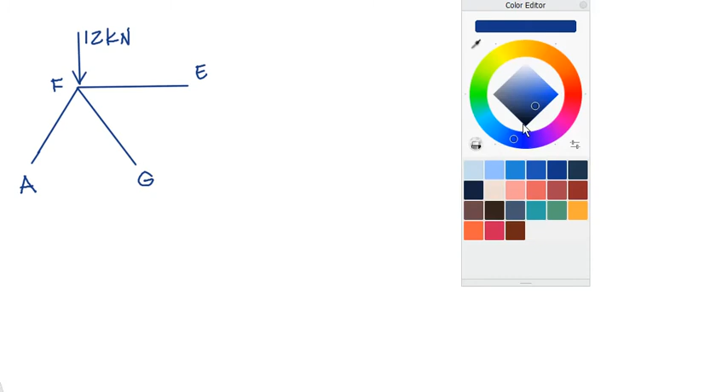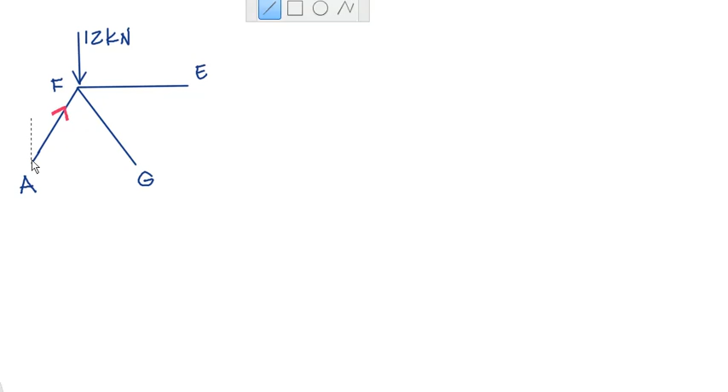Alright, what's the rules? Any force that's not vertical or horizontal, we resolve into components. Okay, we know that AF is in compression. Now, very careful. Compression means it's pushing toward the joint. I'm going to resolve it into its components. Looks like this. Okay, and we know the force here, we know the angle. The angle is 60 degrees.

Now people, just a word of advice. A lot of students, when they come to a joint like this, because they've solved it early on, they just leave it completely out, and they say, no, I'm going to look at just FE and FG. That's wrong. Remember this force here, bits of it are running into AF and to FG. FE carries none of this load, because it's at right angles to it. But members AF and FG are both sharing that load in some way. So that means you've got to account for it again. Even though we know it, I resolve it into its components and solve accordingly.

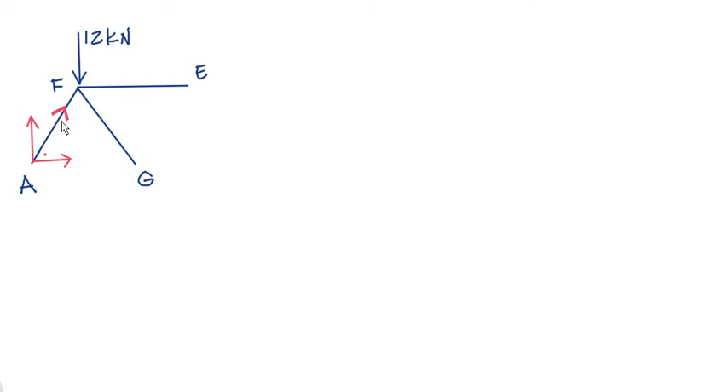Right, so that's 60 degrees. So that there will be AF cos 60. AF cos 60, I'm going to write it over here. Oops. And that's going to be AF sin 60. I'm going to write it like this. Oops, that's not going to be good. AF sin 60.

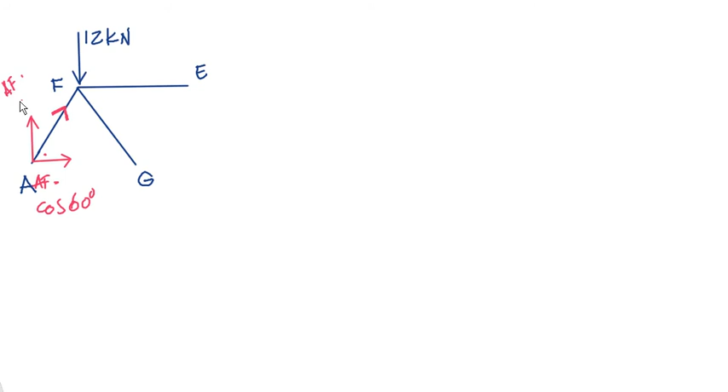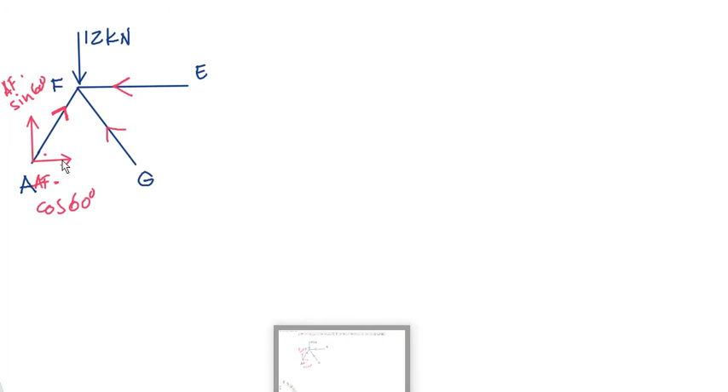Right, FE. I'm going to assume it to be in compression. Remember, E in the frame is sitting somewhere over there. It's 5 meters away. I'm not concerned with what's happening at the right end of E. And FG, I'm going to assume it to be in compression too. G is far below here, it's off my screen, by my feet. It's 5 meters away. I'm not concerned with the lower end of G. I'm just concerned with the upper end of AF, the upper end of FG, and the left end of FE. Okay, one arrow only, not two. If you put in two, you're going to confuse yourself.

Right. I've got to resolve forces in FG as well. So let's just do something here. Right, that's 60 degrees there. So that's going to be FG cos 60. Sorry, my apologies, let me just undo that. And that's going to be FG sin 60. FG sin 60. Right. Do I resolve FE? No, I don't. It's horizontal. So what do we do next? We sum verticals and sum horizontals.

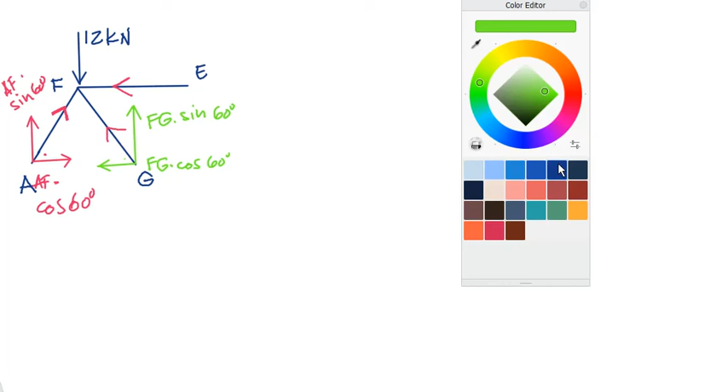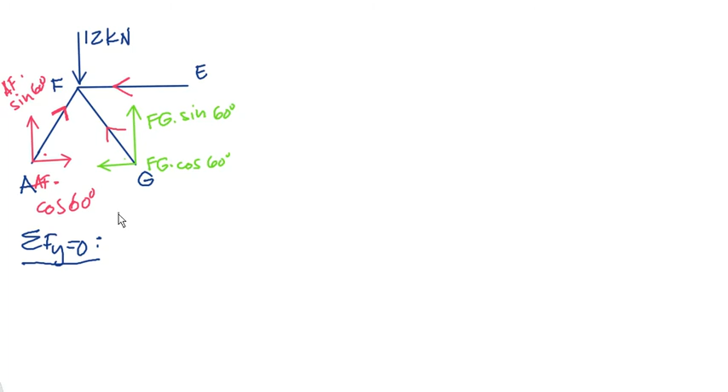Right, so let me just get something nice and blue here for us. I'm going to say the sum of the forces in the vertical plane is equal to 0. How many vertical forces do I have acting at joint F? It's plus this one, plus that one, minus that one. Doesn't matter the order, just take them all. I'm going to start there. So it is AF sin 60 minus 12 plus FG sin 60 is equal to 0. Why is it equal to 0? Because joint F is in equilibrium. Right, let's see then.

Do we know what AF is? Yes, we know AF. Did we solve AF on the previous occasion? Let me just see. Just give me a second. Right, AF was 26.56, so we know AF, so therefore we can determine FG. Right, let's do a quick calculation there. So therefore FG, it's 26.56 times... right, so FG is equal to, I get, minus 12.70 kilonewtons.

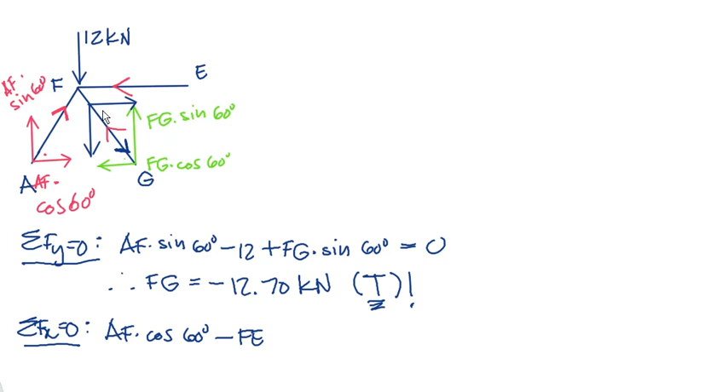Right, people, watch this. This member, it's not actually a compression member, it's a tension member. So I'm going to resolve that again into its proper components. So this is going to be looking like this. Oh, sorry. And what's the angle over there? The angle is 60. So that's going to be FG cos 60. And that there is going to be FG sin 60.

Okay. Now people notice, both horizontal components have the same name, but opposite direction. Both vertical components have the same name, but opposite direction. Okay. Right. I'm resolving forces. So it's AF cos 60 minus FE plus FG cos 60. We're using the force as it's supposed to be sitting. FG cos 60 is equal to 0.

Can I solve for FE? Yes. I know AF from a previous calculation, which is 26.56, and FG is the one we just found over there. So therefore, FE is equal to, right, and what did you get? You should have gotten 19.63. So it's 19.63 kilonewtons.

Alright, what does the question want us to determine? The size of the force and the nature of the force. So the size of the force is 19.63 kilonewtons, and the answer is plus. What does it mean? It means that our assumption that FE is in compression is in fact correct.

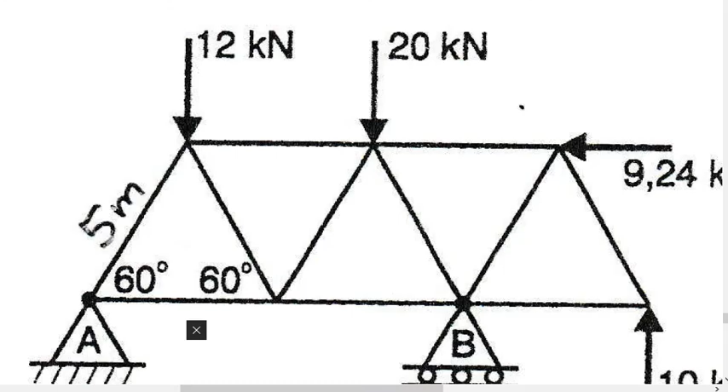Okay. So if I go back to my original page there, I don't know if I can do this. No, I can't do that. Okay. Silly me, I tried, but it doesn't work.

Okay. So therefore, FE is in compression and FG is in tension. So now I've solved 1, 2, 3, 4 at the bottom. I've solved 4 members. Right. So let's just have a quick look there. We've solved members FE, FA, AG, and FG. Okay. Let me rather just throw the sketch in. Just give me a second here.

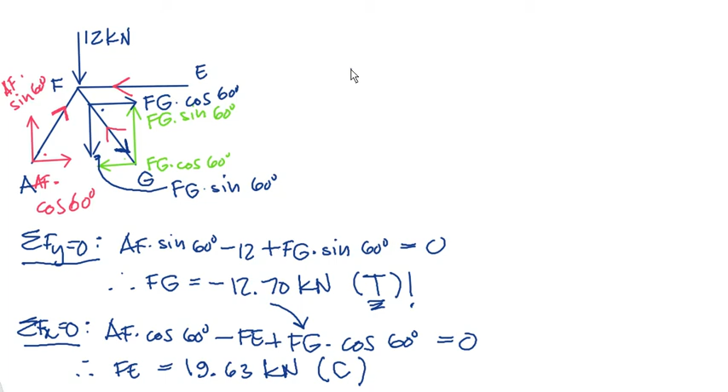Right, people, I've got in a frame there. So let's just quickly talk to it. We've solved member AF. AF is in compression. We've solved FE. FE is in compression. Lovely. We solved FG. FG is in tension, so it's doing that. And we also solved AG, which was in tension, like so.

Right, what are the rules? What joint can we go to next? We can only go to a joint where there's not more than 2 unknowns. That joint's done, that joint's done, that joint done. Can I go to that joint? 1, 2, 3. No, I can't. Can I go to this joint? 1, 2. Yes, I can. Why? Because when I come to this joint, AG and FG are solved. Let me put the letters in quickly here. So that's E, D, B, and that's C.

Okay, so to go to my next joint, I can't go there because that member and that member, there's 2, 3, it's more than 2, can't go there. But if I go to G, that member's done, GE I can solve, GB solve. So the rules are, I go to a joint where there's not more than 2 unknowns. So that's the next joint I'm gonna go to.